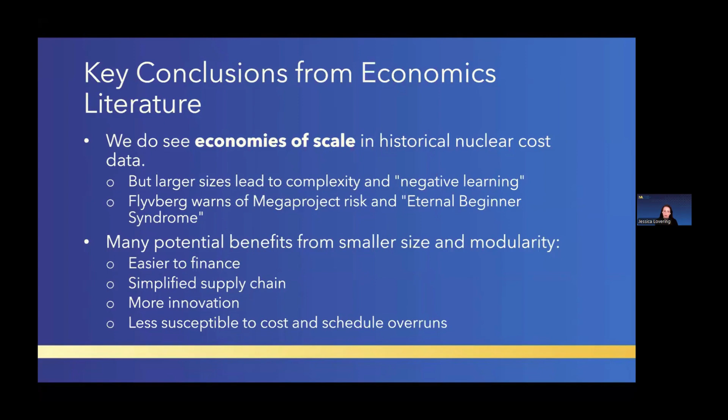And then what we also see in the economics literature, a lot of potential for small modular nuclear, but also from a lot of other energy technologies. Some lessons learned in terms of smaller technologies are easier to finance. You can have a more diverse supply chain, so it can be easier to find components. And if you don't have a supplier, it can be easier to develop the supply chain. If your technology is smaller, it's easier to introduce innovations and iterate on innovations if you're in a factory setting. And smaller technologies tend to be less susceptible to cost overruns, schedule overruns, and labor disruptions and other kinds of disruptions. I'm going to show 2 slides.

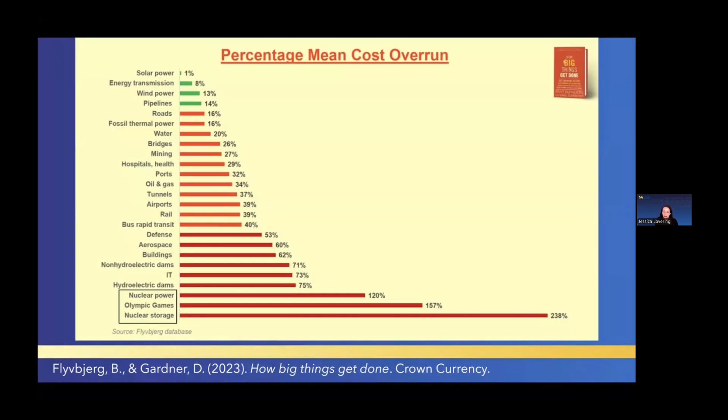And something else that I found really interesting and really motivated this report in the beginning is there were 2 really interesting studies that both came out in 2020. One by Sweerts et al. in Joule and one by Wilson et al. in Science, looking at how size of energy technologies related to learning. And so that's how cost comes down with capacity build or experience with the technology. And they looked at all sorts of different energy technologies, demand side, storage, supply, fossil fuels, renewables. And what they both found across all energy technologies is that the smaller the unit in terms of megawatts, the faster the learning. So the faster cost came down.

And Wilson in particular looked at a whole bunch of different metrics of success, like diffusion rate, return on investment, and found that smaller modular technologies, what they call granular technologies, just perform better on a whole bunch of metrics. And what's interesting is they don't consider nuclear at all because they consider nuclear a lumpy technology. So large, not modular, stick built. And so that's why I wanted to look at the potential of nuclear if it was built in a small modular fashion. Could it benefit from a lot of these other attributes of granular technologies?

So where does this come down? There's a lot more literature that I'm not having time to cover right now. If you're really interested, I do go into a lot more detail in the report, so I encourage you to look at that if you want to see more of the details.

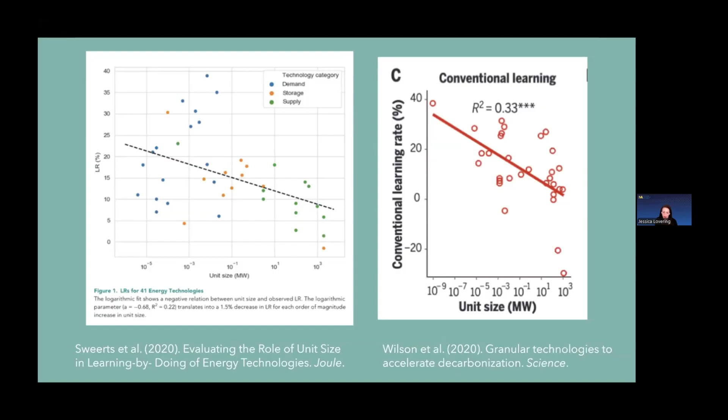But I think where we came down after reading all this is that both big and small actually can work. We do see success on both in certain places, but you have to have the right enabling conditions. So there are definitely places like South Korea or China where large reactors have been really successful and they've come down in cost and they've been built on schedule. Or Sweden, as we were just talking about before the webinar started.

So what you need for success with large reactors is strong demand growth for electricity and energy. It helps to have state-owned or state-supported utilities, vendors, owners of the plant so that they can coordinate. More of a paced deployment, so some sort of comprehensive and coordinated industrial policy. Indigenizing the supply chain, developing your workforce, again, that sort of coordinated strategy around the nuclear build out.

It also really helps to have a productive labor force. And I just want to note, I'm not saying a cheap labor force. You can have high wages and still have cheap nuclear if you have a very productive, highly skilled labor force.

For small and micro reactors, again, we haven't really built these for nuclear, but learning from other energy technology, what we think we would need for success would be high volume licensing, so not one-off licenses for each power plant. Factory fabrication, obviously. A committed order book, that helps for large reactors too, but for small and micro reactors, having that order book really incentivizes the company to invest in the factory fabrication facilities and other facilities to build the modules. Minimal on-site construction and on-site labor.

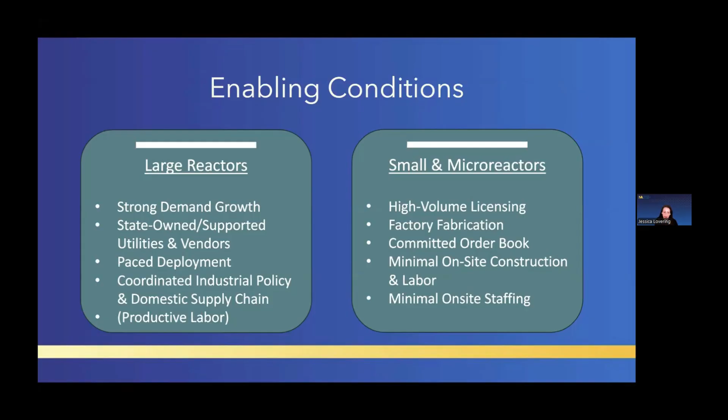And then lastly, the second half of the report actually looks at potential market applications for these different size classes. And what we find is that there's likely enough of a market for each size class of reactor, but they really don't need to compete at all because the markets are big enough for each size. So it's more about matching the reactors to the customer's needs, or what we call right sizing reactors for markets.

So just for example, microreactors, as my PhD research looked at, good for off-grid and microgrid applications, remote extractive industries like mining, defense installations. SMRs, of course, data centers are really big right now, but also industrial process heat, granular addition, so adding little bits of power to an existing grid or power plant, medium-sized grids, or even traditional utility markets if the cost comes down enough.

Medium reactors, say 300 to 1,000 megawatts. Municipal utilities, often that's a much better size match for their grids and their balance sheets. And also thermal power plant repowering, like coal plants and natural gas plants, tend to be more in that size range, and so it's a better match for replacing them.

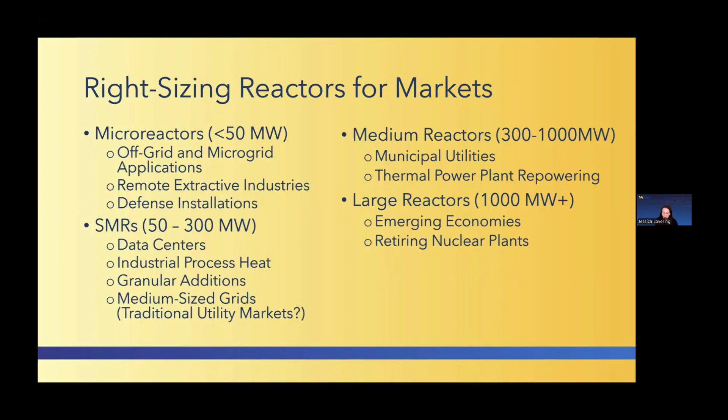And then large reactors, there still is a big market for these large reactors, even the really big ones, particularly emerging economies that have strong growth in demand for electricity, and also retiring nuclear plants, especially if they're on the larger side. You might want to replace them with something that's matching capacity or even a little larger to take advantage of the power lines and the water rights if you have them. Yeah, so that's a summary of the report really quick, and I'll go to the panel.

Thank you, Jessica. And I have to admit that I had never really thought about Olympics and nuclear cost overruns as being somewhat comparable.

So, very interesting and very timely. We do appreciate your leadership in developing this new NIA information resource. Now, we're going to hear from some of the industry leaders who have expertise on this question of right sizing, and really based on what their companies are doing right now to create the next generation of nuclear power.

We're going to start with Rob Stewart, the Chief Technology Officer for Alva Energy. Rob will be followed by Rita Baranwal, the Chief Nuclear Officer for Radiant Energy. And Rita will be followed by Per Peterson, the Chief Nuclear Officer for Kairos Power, and also a professor at UC Berkeley in their Department of Nuclear Engineering. I'm not going to interrupt the conversation to introduce each person again. So they're just going to speak in the order I just listed. We'll start with Rob. Rob will turn things over to Rita, and Rita will pass the mic to Per.

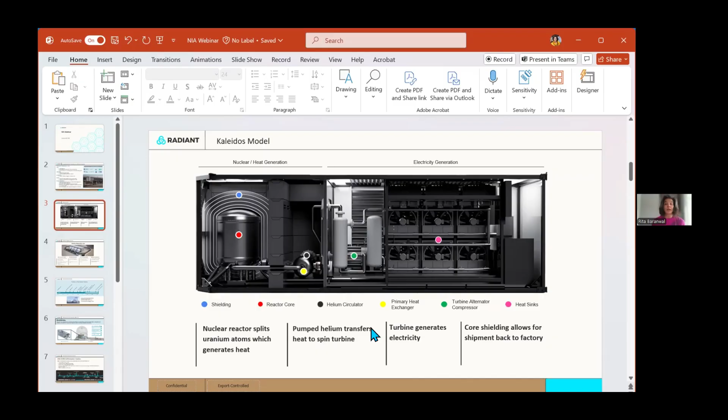There we go. So we are a microreactor company, and I like to call this a megawatt in a box. It fits inside a standard shipping container. It is 1 megawatt electric, 1.9 megawatts thermal. We are utilizing helium as the coolant and TRISO fuel particles with HALEU. As I mentioned, we have a HALEU contract. We're using HALEU in the form of TRISO particles.

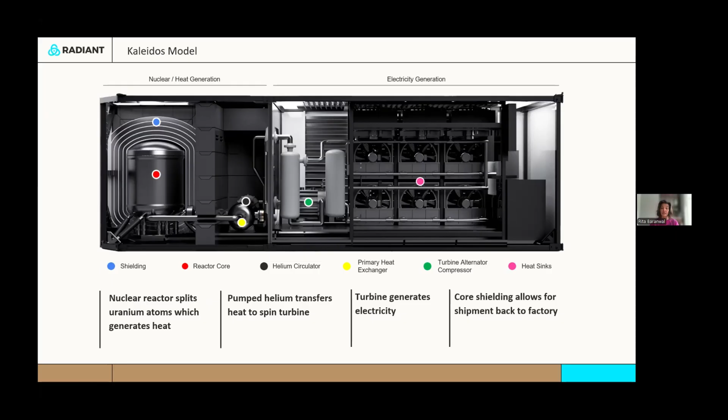So you'll see kind of a cutaway of what is inside the box here. In addition to the core itself, we have the appropriate amount of shielding, and then what we call the TAC, the turbine alternator compressor, and then the heat rejection system, the heat sinks at the end. So when we are in DOME, well, let me get to that in a second.

So you'll see here 4 of these Kaleidos units as a depiction here. That area inside the fence line is about the size of a tennis court. And so it's really demonstrating the small footprint that you need to deploy these reactors. Our concept, once the site is ready to accept one of these reactors, it takes less than 2 days to install. Because it is helium cooled, there's really no risk to the customer site.

If one chooses to load follow, they can do so. Now, as somebody who has spent nearly 3 decades in the nuclear industry, I don't know why you would take this very valuable asset and want to load follow with it, but should one choose to do that, it is absolutely capable of doing so.

Here's a couple more facets about the reactor. The reactor itself is designed for a 20-year life and can be left on its own and running for 5 years. And so we refuel it every 5 years. We bring it back to the factory in Oak Ridge, refuel it, and send it back to the client. And it can be refueled 3 times. So 20-year life with three refuelings in between. And the reactor can ship from our factory by land, sea, or air.

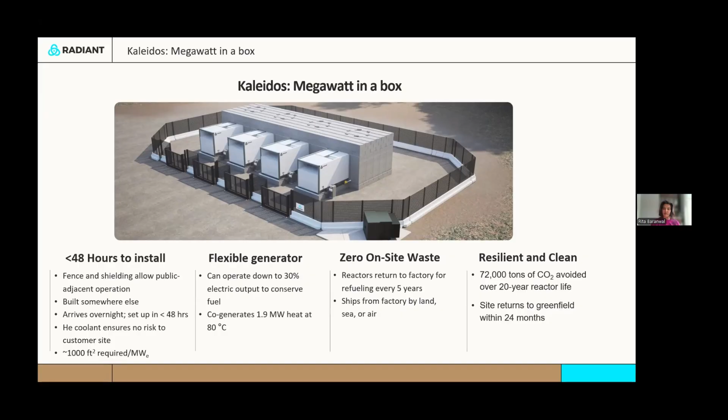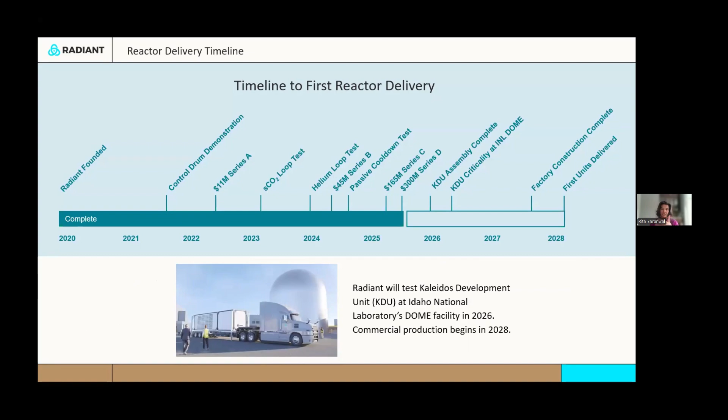So you'll see here a bit of a timeline to the first reactor delivery. I'm not going to go over this, but we were founded in 2020 and have completed many different technical demonstrations, as well as funding raises that are very important to ensure that we continue down this path to demonstrate in DOME.

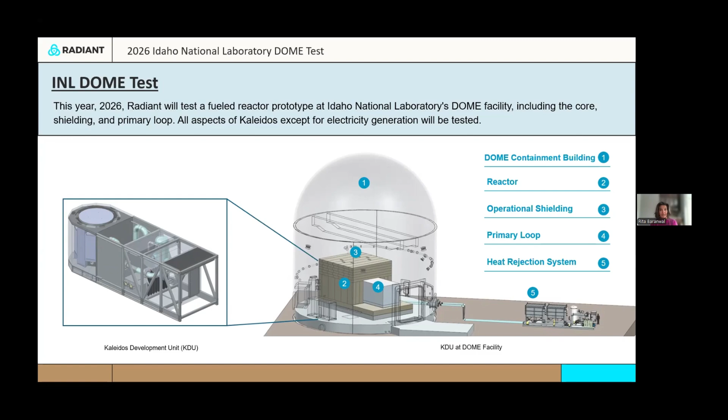So what I want to share with you on our DOME test is that we are testing exactly what we intend to commercialize, except for the fact that the heat rejection system cannot fit inside DOME. So it will have to go outside of the DOME just because of the footprint constraint by the original EBR-II dome. And so we will not be generating electricity. We will be running at full power for 150 hours. And then that heat will just be rejected to that heat rejection system.

And we are also pursuing an NRC licensing pathway, not only for the factory, but as well for the technology. So we're doing both activities in parallel.

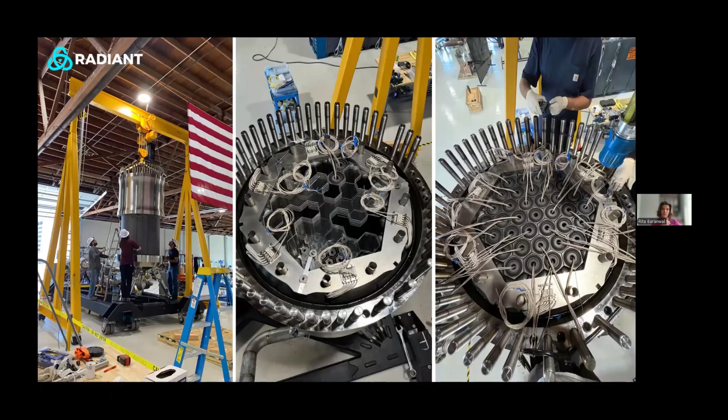Now, we did invite the NRC to sit in on our preliminary design review last fall. Even despite the federal government being shut down, we were privileged to have two NRC folks in the room with us, and then four on the phone with us during this multi-day design review. So in the spirit of making sure that we're not being redundant as we move forward in the different regulatory timelines, I'm really grateful and appreciative to see NRC and DOE in the same room, hopefully behind closed doors, comparing notes as we move forward on each regulatory timeline.

So what you'll see here, this was our passive cool down test that we conducted in El Segundo in September of '24. And on the right, you'll see 37 different monoliths that are all instrumented with thermocouples to simulate fuel. So we did that test successfully in '24.

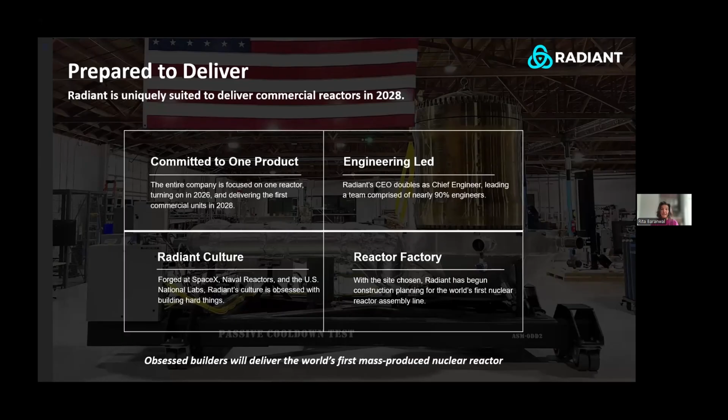I'm proud to be part of a team of obsessed builders that are working towards this mission to deliver the world's first mass-produced reactors. And I will leave you with, we are absolutely hiring. So workforce development is something that is absolutely crucial to what Jessica and the report talks about. And so I'd be remiss if I didn't talk about the fact that it is very important what Per is doing at Berkeley, what my colleagues are doing in academia, and even just out of high school, right? The folks that are going into trade schools and onwards, all of them are absolutely vital for the nuclear industry to deliver on its mission.

So thank you very much. I look forward to our questions. Hand it over to Per. Oh, thank you, Rita. This has been a fantastic discussion, and I'll add just a few more thoughts as well.

A lot of what we're building on really emerged in the 1990s with work to develop passive safety systems, initially for light water reactors like AP1000, ESBWR. And we then saw a set of designs coming out for smaller light water reactors like NuScale. The transition to passive safety I view as being one of the most important enabling technology steps.

The next set of things that become really interesting then do involve the question of transitioning from water as a coolant for reactors to coolants that can enable reactors to operate at higher temperature, and also to eliminate the need for high pressure, low leakage containment structures, which are required for water cooled reactors. Water has wonderful attributes as a reactor coolant. It also has a big downside. It literally can boil away. And so the safety systems that are needed to manage that do include high pressure, low leakage containment structures that do increase the cost of reactors.